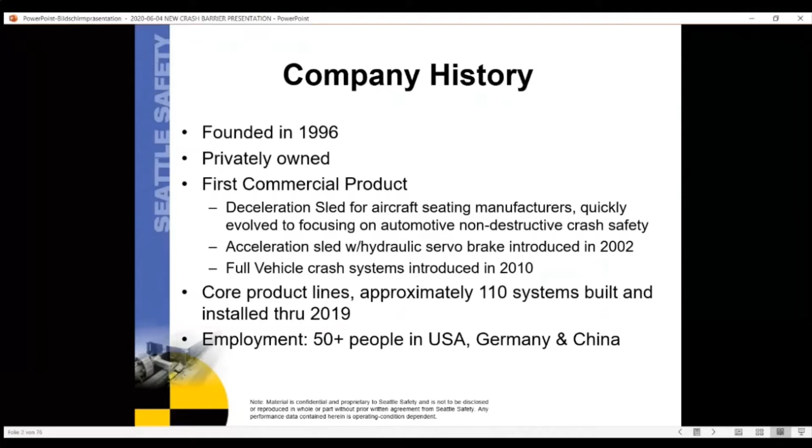We have already 110 systems on the market. From the barrier labs, I would think the number is about 7 or 8 on the market. We have 50 people working for us in the US at our main headquarters, then in Germany and in China. As I said, our owner and lead engineer is a person who is very much into development.

His vision is really providing innovative solutions of unparalleled value to our customers. That's something like Porsche did. They come to us and say we have a specific question, a specific issue we need to deal with, and then we come into the game and develop something specifically for them. And afterwards, we use this technology to go to a wider market, like we do with our barrier products.

So, a short overview of our products. Crash barriers, I already mentioned. Decelerator sleds, typically used for aeronautic seats nowadays. Servo hydraulic sleds are a very important product for us, our bread and butter product, with 110 systems worldwide. I think in India we have 4 systems sold at the moment.

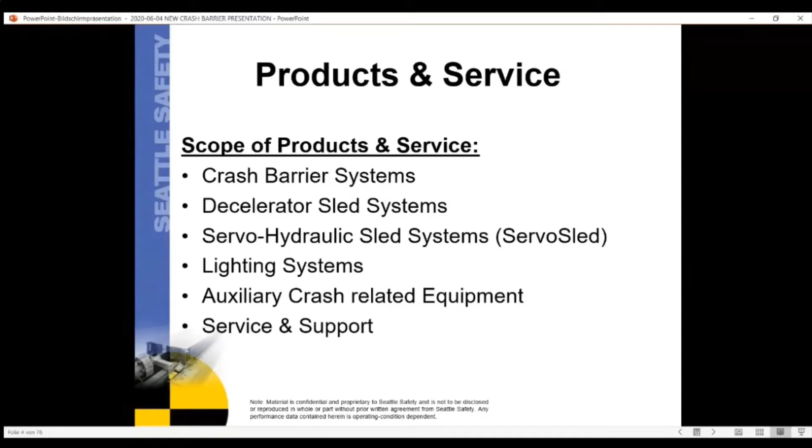Lighting systems, LED lights is what everyone wants to have at the moment. We offer a very good and affordable LED light system with our barriers and with our sleds. And certainly we have some auxiliary crash-related equipment. Most important, and that's why I really emphasize this, is service and support. We're having service and support from Europe and from the US, so all our customers are getting in-time service, very proactively.

ServoSled, I'm just going to show a few pictures. Here you see a ServoSled with an LED light, which we manufactured.

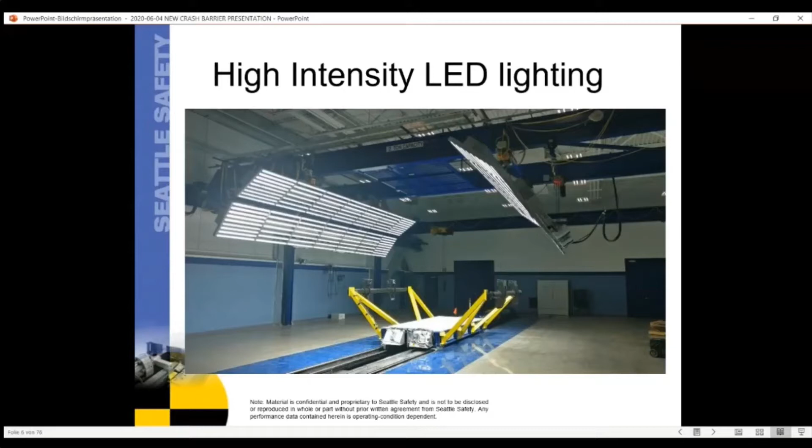And certainly the full crash vehicle barriers, which is the topic for today.

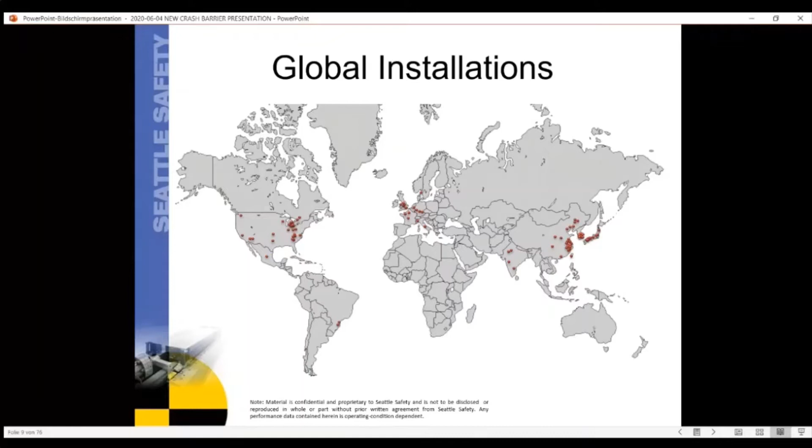I'm going to share this presentation afterwards, so if you're more interested, go through our customer list. You see here 1, 2, 3, 4, 5, 6, 7, 8 systems already on the market for our barrier systems, and we have a global footprint. That's so important at the moment, especially since many of our customers have a sled in the US, in India, in China, and want the same results—that's why they all go for our sleds and barrier systems.

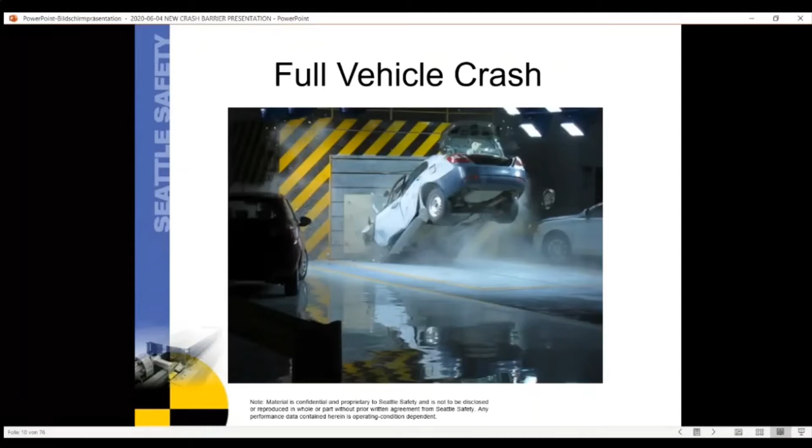But now let's start to look into the full vehicle crash barriers, which is the topic for this meeting today.

There was a reason why we went into this business. There were one or two players in the market before. As I mentioned, Porsche approached us and said we need a better system, something which fits into our facility and is tuned for us.

So why do we need better systems at the moment? I think the most important topic to understand is that accuracy is what's driving crash barrier systems to get refurbished or replaced. The technology used in older crash labs comes from the 70s or 80s, and things have changed since then.

For example, there's the very high accuracy of impact position. You want to be able to hit a target—a crash barrier or vehicle—with a trolley within a few millimeters range. That means you can't allow a free run of the car between decoupling from the rope and hitting the barrier of more than about 1 meter. Because a free run of 1 meter means that even if the car is pretty well aligned, you're going to hit the position you want, plus or minus 10 millimeters.

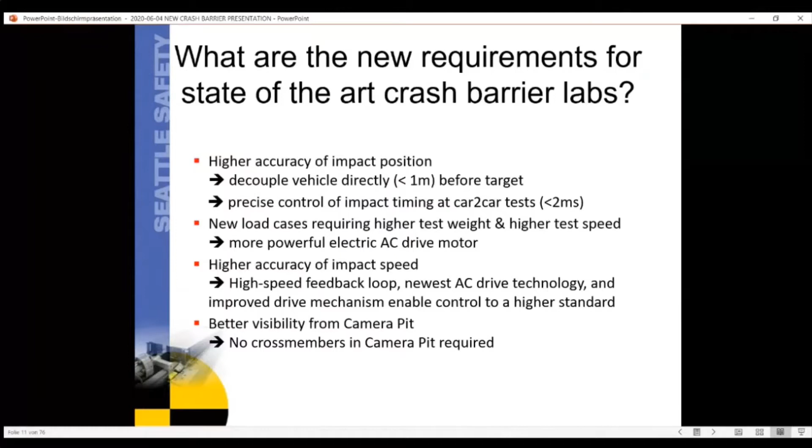Then we can drive back the power a little bit so we have the right position at the right time. And very important too, because the simulation departments have such a fantastic way to look at vehicles during the crash, they want a better view from the pits, from the window, from the film pits below the car. So we developed a film pit with no cross member, giving a very good view from below without structure hindering the view to the bottom of the car.

So the basic principle of a crash lab, I'm sure you all know this, but I want to shortly explain it because later I'm going to use terminology which comes from here. It's a loop of rope. On the loop of rope we have something we call a skate. The skate is fixed to the rope, and the skate is pulling the vehicle towards the block. Then you have a film pit in front of a block, and you have the crash block. That's where you hit against.

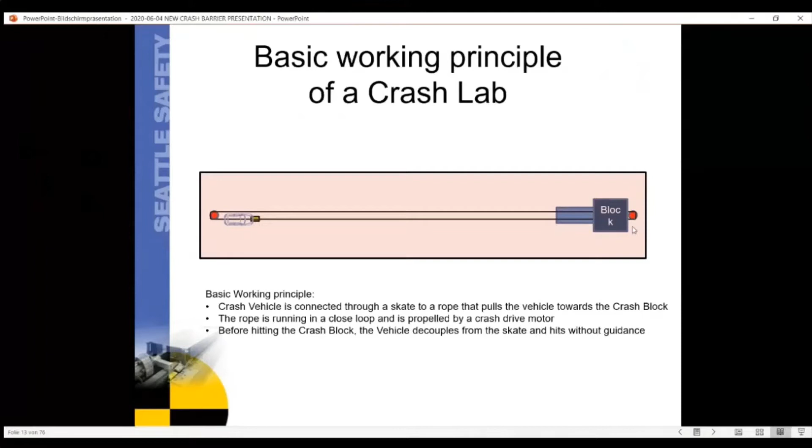Or you have a film pit here, and you have a side crash, for example, on a standing car. Behind the block, or at any position, we have a motor which is accelerating the car and which is controlled by a control system.

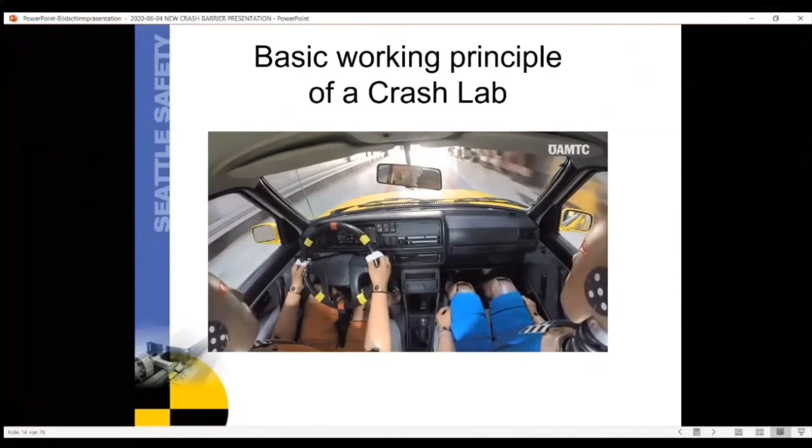That's exactly one of these crash labs I'm talking about at the moment. It's just a single track crash lab. You go in one direction and you hit a block or another object you want to hit with the barrier.

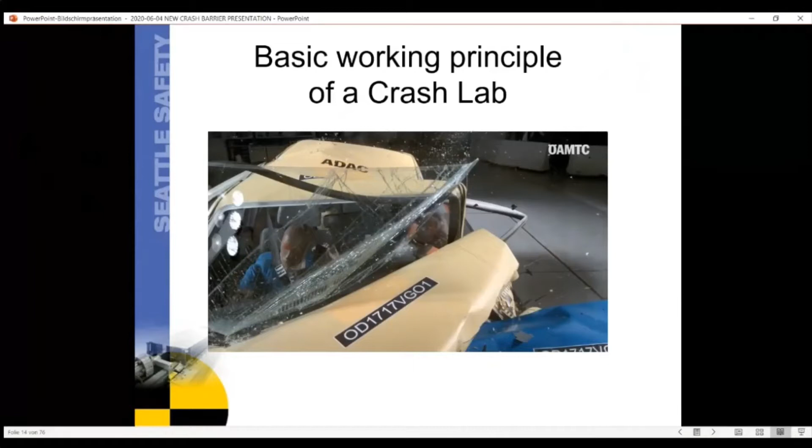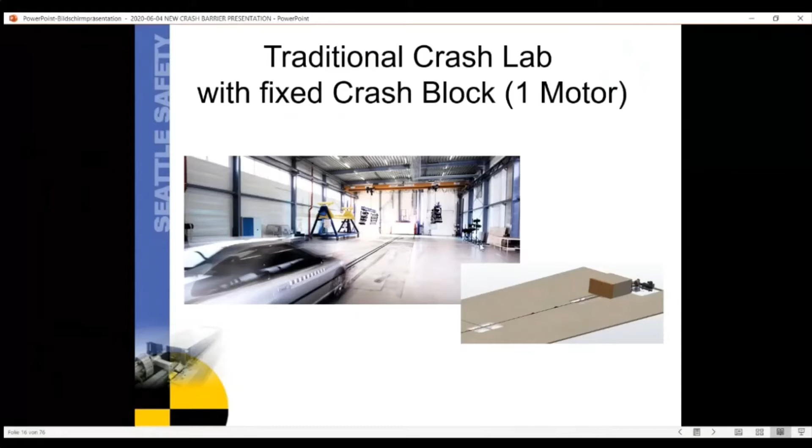Then the more new design is looking like this, I guess. So we're talking about a crash arena. That's driven by the fact that you want to be able to do car-to-car crash. So you want to have two cars, one coming from the right, one coming from the left, and you want these cars crashing against each other or against an object standing on this big film pit in the middle. The big advantage is you just need crash light once. Crash light, LED light, is expensive, so if you can work with one crash light, that's better for you.

And then you have this movable crash block. So in case you don't want to do a car-to-car crash, this block can ride into the crash arena, is going to be positioned behind the pit, and you're going to have an impact point. Here, we say the crash arena is 30 by 30 meters.

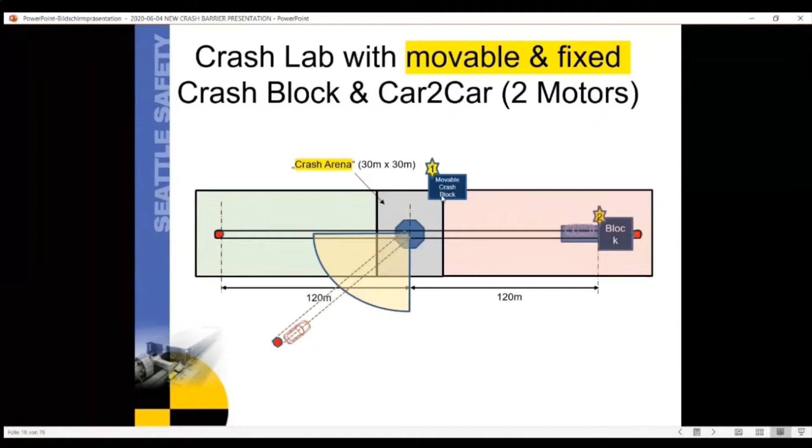Then another layout for a typical crash arena is here. This is a customer, Ford in Germany, who's just getting a barrier from us. They have an old building, which is the rosé part here, with a crash block, a drive system and a pit. They wanted to be able to do car to car. So what we are doing at the moment is building the whole system new, and they get this crash arena here, and they get another track.

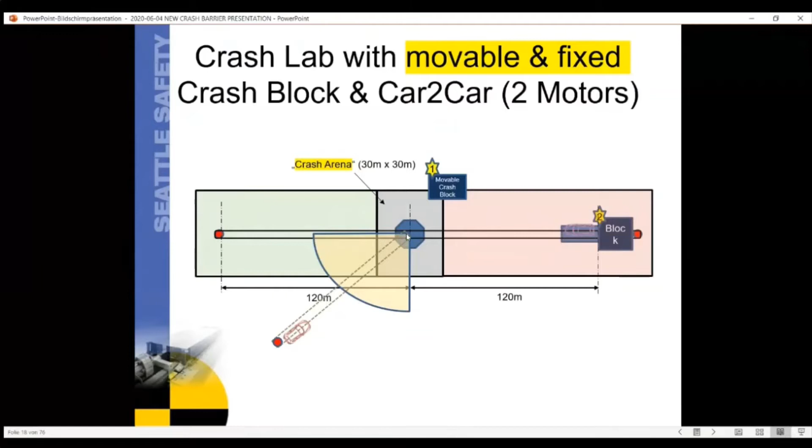120 meters is pretty much what you want to have, to be able to accelerate with a maximum acceleration of 0.2 to 0.3 G until you hit, because you don't want your dummies jumping around in the car from very high acceleration. So again, here it's the same constellation, but in this case we have a second motor, and the second motor is also driving an angular track, which is able to hit cars coming from here or from here, depending on what kind of load case you want to run.

Why are we using this kind of crash arena style? It's shown on this picture. On the top picture here, you see the zones which have different colors.

These zones we call crash influence zones. These are areas where we looked at all the load cases going to happen on this crash barrier lab, and looked at the position before and after the impact. This is a position where a car or trolley could be after the impact, because it's sliding away, because it's rotating away. So here you see that doesn't fit into a small room. So we decided to go for, that's a typical layout at the moment, 30 by 30 meters.

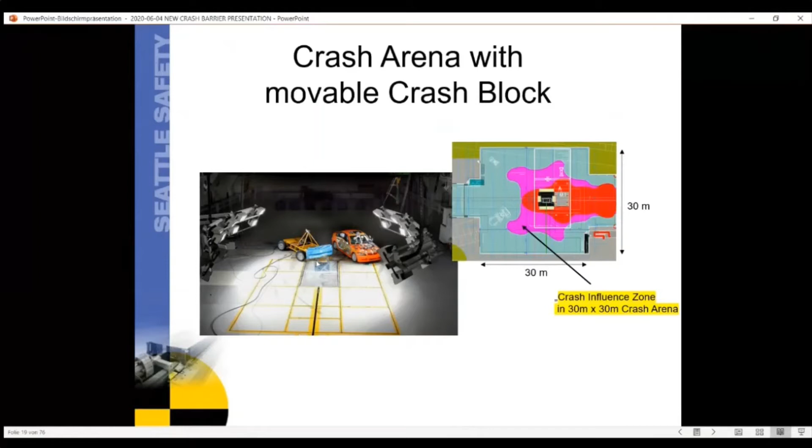And all testing is pretty much taking place in this crash arena. You can see the light here, you can see the after-crash situation. That's how it works. Location of the crash drive, so the motor.

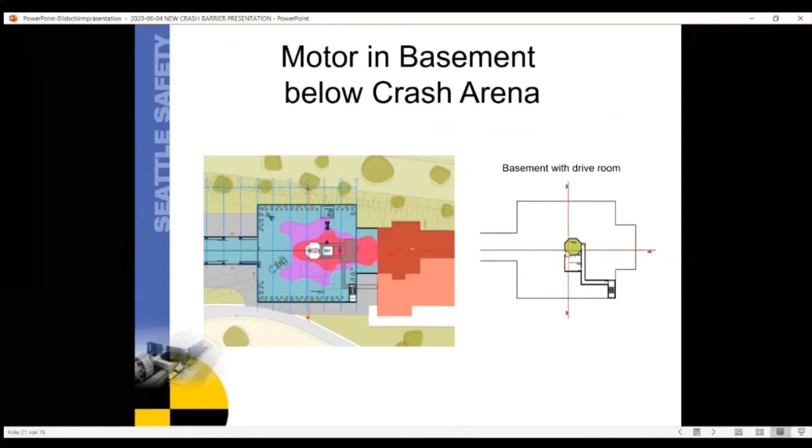We have different ways to position this. The modern way for many new crash labs is, especially if they work with a crash arena, they have the motor below, somewhere in the area of the crash arena below the floor, in the basement. Then they would have a simple gang to the basement, and the motor would be installed down there.

It has an advantage and disadvantage. The advantage of this is clearly, if you accelerate cars from this side, especially against the block, you want to have as little rope between car and motor as possible, because the less rope you have between car and motor, the less spring and deflection you have in the rope.

We have a solution for both, a very accurate solution for both ways of positioning the motor, so for us it's not really necessary to position the motor below the track.

The disadvantages are certainly its accessibility. You need to go down to the basement in order to access your motor, and even worse, if you want to do a car-to-car crash, say a right-hand to right-hand side crash, you see that the right skate is not able to run directly onto the film pit, which we usually want to have, because, as I said before, you don't want the free run of a car to be more than 1 meter. So here you have to stop the skate before it goes down to the basement and comes up again. The skate cannot run over this gap.

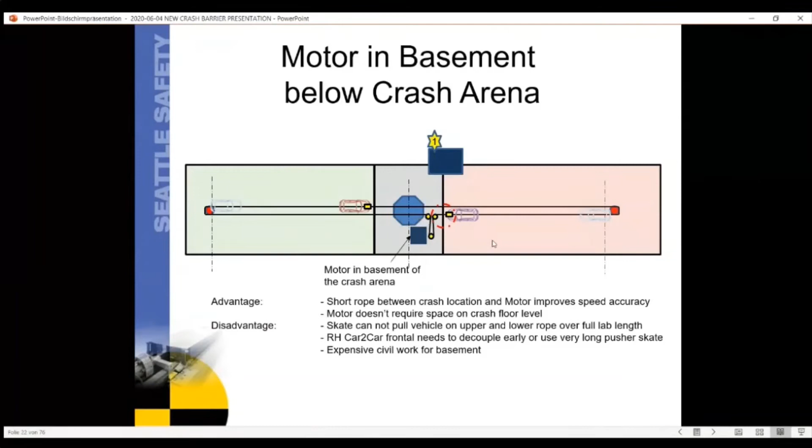There are other solutions for how you can still control this, but it's a little bit harder to do. So we pretty much do both, but we prefer the motor at one of the sides of the crash barrier, because then you have the possibility to have both sides of the rope going forwards and backwards over the whole length.

Many customers want to do parallel testing. So what they do is one test on the middle pit with a block standing here, and at the same time they already prepare for a second test on this side. So they're much more effective, and can do 2 tests in a very short while. This is a big advantage of having a rope going through the whole facility.

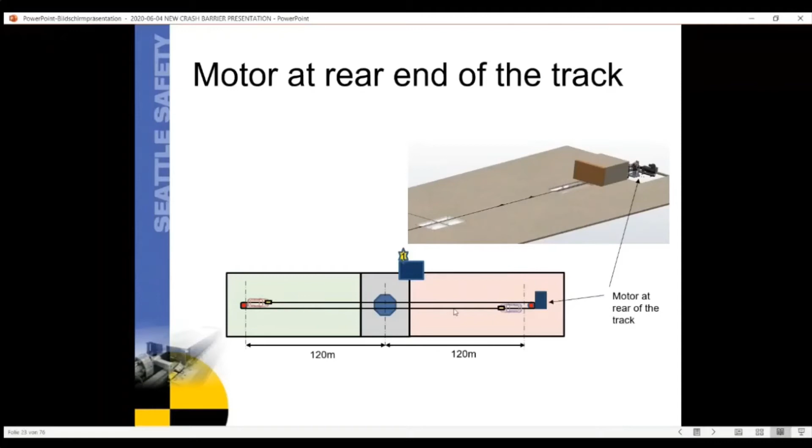Here again, the motor at the rear end of the track, and you can see now both skates can go up to the pit cover and window, and you can accelerate both cars very much until they hit themselves. You would decouple perhaps a meter before the impact point, because you clearly want to show on a photo and in proving data that there was no connection between car and rope, which is necessary for legal testing.

Here we have the possibility to prepare two tests at the same time. If you just want to prepare a high-speed test on this lane, you can already prepare for a low-speed test on this lane, and everything is fine. The disadvantage of this is a little bit less accuracy, even though with our control systems we are still able to control this to less than 0.1 kph.

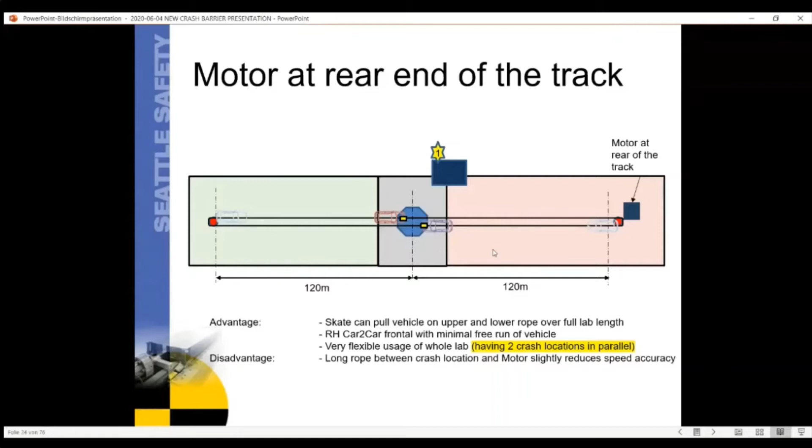Bare friction drive - that's something I want to explain in a very detailed way. As I mentioned before, Porsche was the first customer for this specific drive, and they already had an existing drive room.

The advantage of this new drive is we can run it with both the existing steel ropes, like you've probably seen in typical crash barrier labs, but nowadays our customers start working with high-strength polymer ropes. There are some advantages with polymer ropes. For example, the weight is much less, a tenth of the steel rope. There's a big advantage in breaking behavior, and it's less dangerous if a rope breaks.

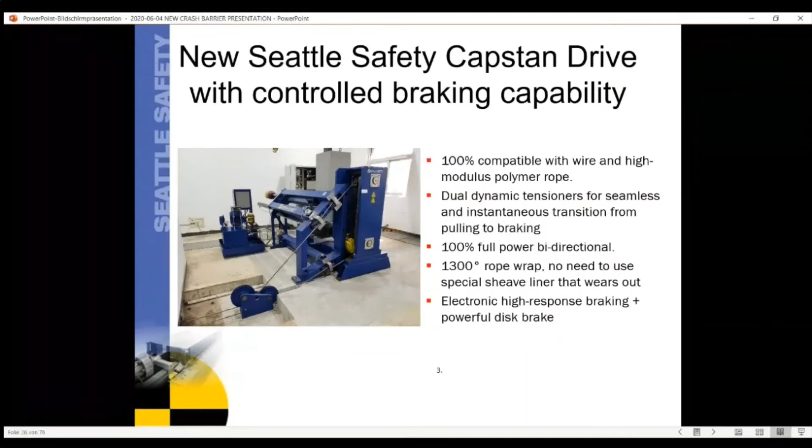This 1300 degree rope wrap we are talking about here is very important. The rope wrap shows how much force you can put into the rope - how often the rope wraps around the pulling sheaves - and that allows us to tension with much less force. If you have a high number of rope wrap, you don't need big tensioners, and then it can be quick - we can switch from one direction to the other in less than 10 milliseconds.

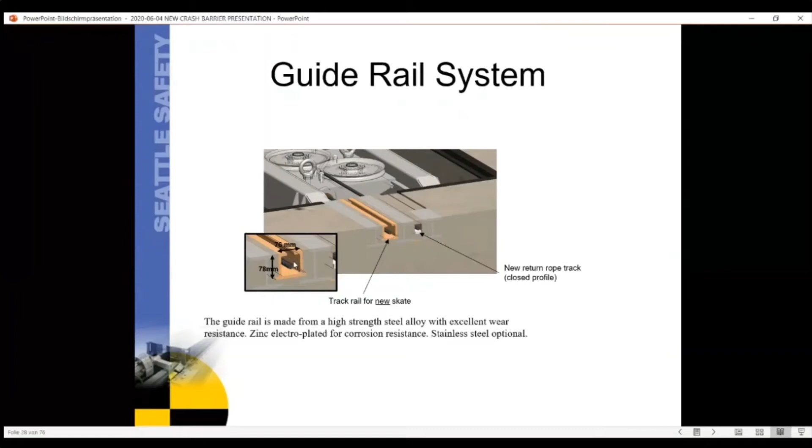Our new rails, the micro rails we have, are 78 by 25 millimeters high and wide - that's very, very small, pretty much the same as our competitors have. That's a very typical arrangement. Here you can see this was at a lab where we already had rails on the floor - these are the old rails for the skate, and this is a new rail for the skate, and the skate is running in this rail, so the skate is guided by this rail.

There's a difference between the distance between the guide rails. What we introduced, and I think we were the first on the market to introduce this, is having a distance between the two rails of 125 to 130 centimeters.

There's one good reason for this: visibility from the film pits from below. You want to be able to see the full vehicle from below and see how the motor is behaving, how the structure is behaving, and even how the exhaust system is behaving. So you don't want both rails in the middle of the lab, because this would cover much more of your vehicle. So we decided to go with a configuration where one of the rails is mostly below the wheels, so you have a very small rail when looking from below, and you can see the whole vehicle surface and underbody and how it's behaving during the crash.

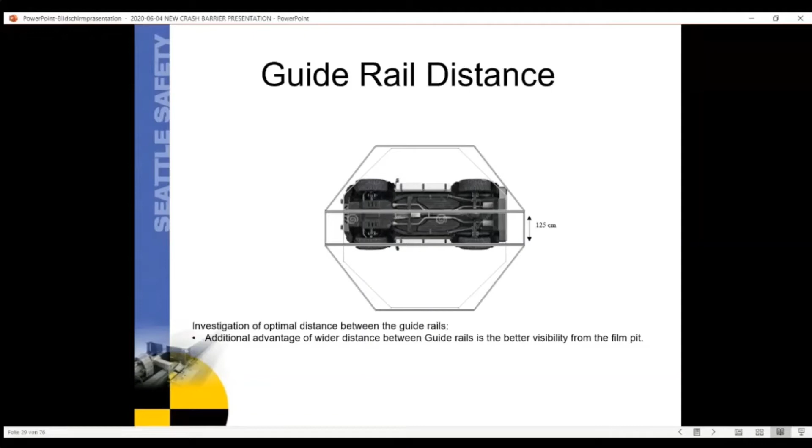Another very important reason we built this is for car-to-car crash with offset. There hasn't been a good solution from my perspective until now, because there are small outriggers on the skate which put the excenter to the car before they crash. The big issue with these offset bars on the skate is that one of the wheels always jumps over it, so it destroys your outrigger after each test, and the test doesn't happen like it should. There shouldn't be any involvement of any other part of the skate that keeps the wheel from turning or keeps the car from rotating.

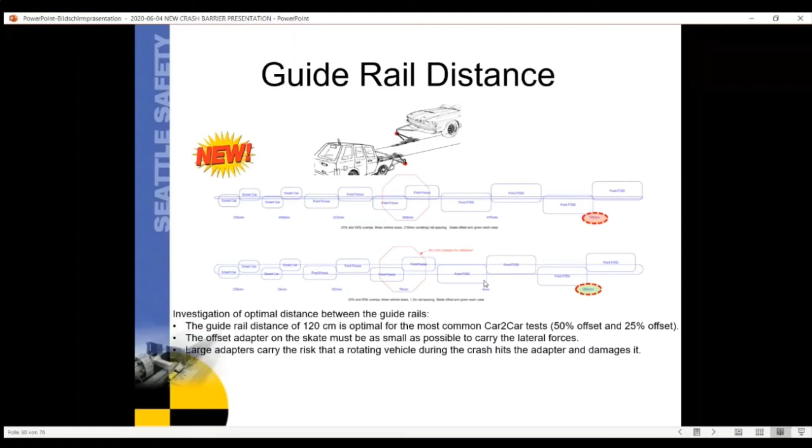So we looked into this and recognized we can have much smaller triangles, these offset triangles, if we have a wider distance between our rails. So in the wider rail configuration, the maximum excenter we need is 300 millimeters, 30 centimeters, and for the smaller one it's 790, nearly 800 millimeters — so it's more than half a meter, a 0.8 meter long offset arm needed for this configuration. We run with these configurations and are very happy with this.

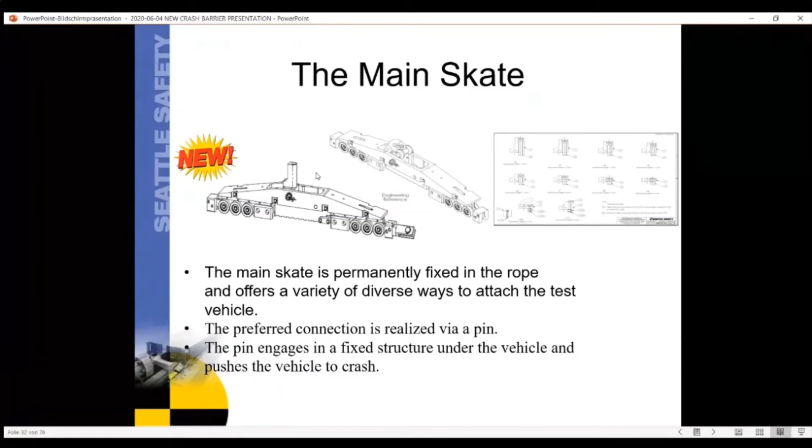But here I can explain quite well how the system works. So the skate is running — as said before, you want to decouple the vehicle from the rope and from the skate approximately 1 meter before the impact takes place. That's exactly where you position this triangle, and we have a ramp for that.

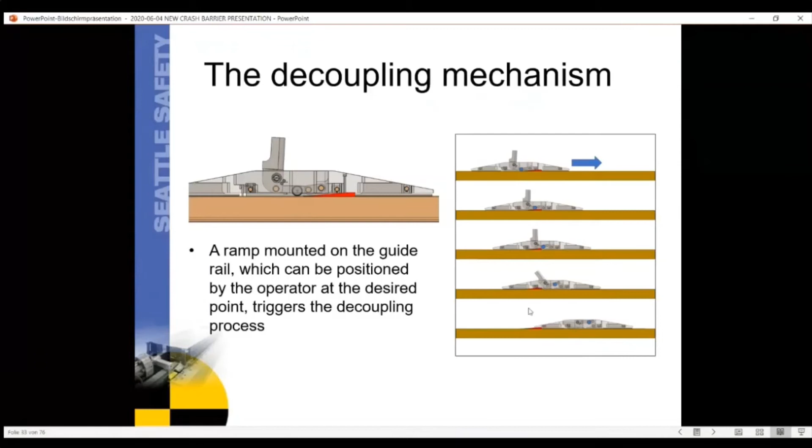We have a small ramp, a steel ramp with magnets in it, and you position it on a rail. When the skate runs over this ramp, there's a triggering mechanism, so the post which connects to the car falls down. You can position the ramp wherever you want on the line — it just sticks with a magnet to our rail. Then as it runs over, it starts to tilt and falls down, so there's no more connection between car and skate.

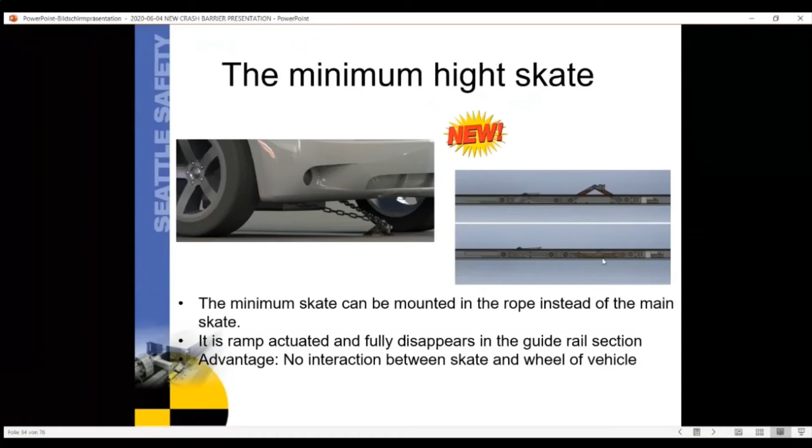What we have too is a second skate, and here's one application I can show you for the second case.

Now, oh, why didn't it work? Here we go.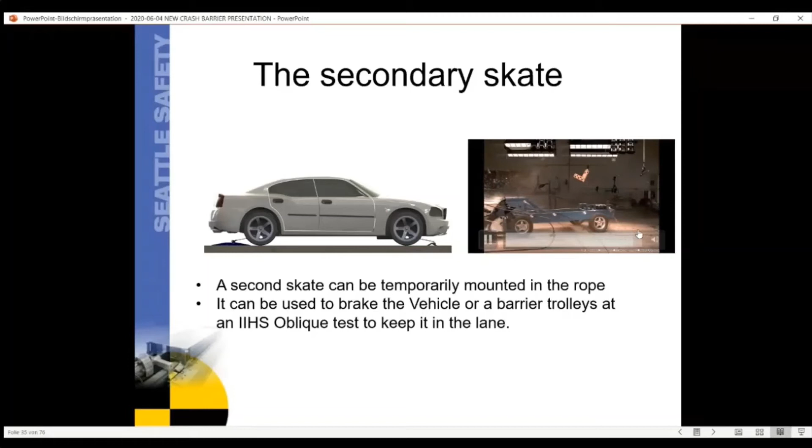You see a trolley coming. The trolley is equipped with two skates: one skate pulls the trolley, and there's one skate behind the trolley. In this configuration, after the impact, we brake the trolley so there's no second impact between car and trolley. This is required for some load cases, like IIHS oblique. So you don't see the other skate here, but there is a connection, and the trolley is braked.

Another feature we have with a second skate is this one. I told you before that we were not happy using triangles on the skate in order to offset the vehicles or the trolley. So what we are doing here is equipping the trolley with a fixture which is able to shift the attachment point, or the rail, from the very left to the very right.

So here you see the trolley is on the very left side - that's for a high overlap crash. And here, for example, you see the trolley is very much on the right side. So you don't need any more triangulars on the skate - you can just do this by modifying the position the trolley is running.

Why do we have two of these structures? Because the pulling of the trolley happens eccentrically - we're still pulling here - so we need to control the moment of inertia, and that's why we have another skate behind there. But shortly before impact there's no more pulling at all, because we do a ramp with pulling. Then both skates disconnect, collapsing fully into the structure, and the whole trolley, without running over a triangular arm of the skate, can impact the other vehicle and do the test as it's supposed to be.

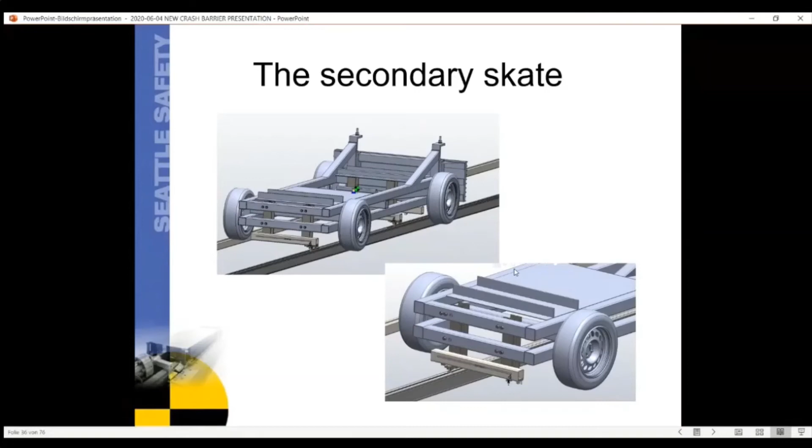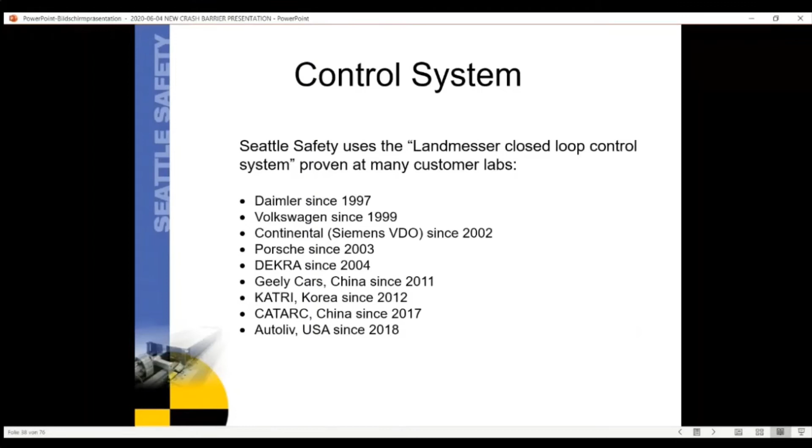Control system - let me give you some words about the control system. We work with what we call Landmesser control. It has been working with crash barriers for a long time, with Daimler, Volkswagen, Continental, Porsche, DEKRA, Geely, CATARC, and Autoliv in the US. And now Nissan in the US, Ford in Germany, and another Chinese customer are getting it too.

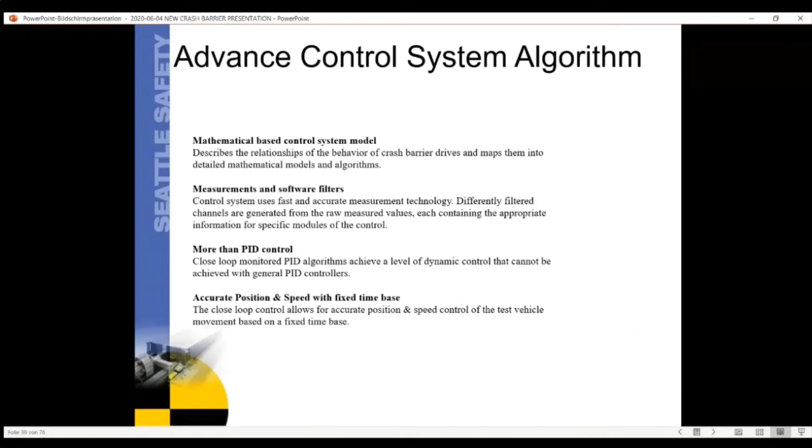This control mechanism is more than just giving power and pulling the vehicle or the trolley. It's about controlling the speed and the position of the trolley over the acceleration phase, every single millisecond, to be able to have a very accurate impact point, impact speed, and impact timing. Here I show you - very important - it should never overshoot the speed, so there should never be a case where you don't approach the target speed.

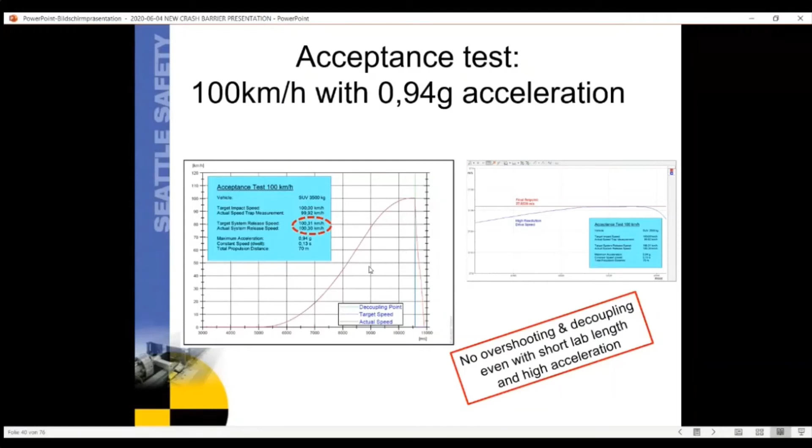And we were able to do this with a tolerance of 0.01, because the set point was 100.31 and the outcome was 100.30. So we were able to control this very high acceleration impact very accurately.

Here is something I've shown you before. Many customers need to test their autonomous driving features at the moment, and the first one is pre-impact braking. That came very early - it's the car recognizing shortly before an impact that the driver is not paying attention and is not braking, so the car does an automatic full braking to reduce the speed at impact. It's not that you won't impact anymore.

We want to reduce the maximum speed. We impact the other car, so the car itself brakes suddenly, and this puts the driver—because he doesn't recognize that the car is going to brake soon—in a different position in the car compared to the airbag. So if the car's braking, the whole body is already going forward, already in the air in your belt. It's a different seating position than if you would just hit the wall without any pre-impact braking. That's why you have to prove that even with pre-impact braking, the belt system with the airbag system works fine. So how can we prove this?

How can we do this? In a crash lab, it's very hard to really use the sensors. So what we are doing, and using prototypes very often, is without an active braking system. What we have here is a car equipped with a brake which we can control through remote control. We propel the car to 80 kph, and that's where the vehicle brakes are triggered. Then the vehicle brakes are braking down the vehicle, and we allow this to happen. The brake is braking a little bit harder than it needs to, like 0.6 G for example, when we want 0.5 G braking. This means the motor is still pulling a little bit, still controlling to have the right speed at the impact point and at the right time. That's something we were able to prove with very high accuracy—that we were able to provide this pre-impact braking on a crash lab.

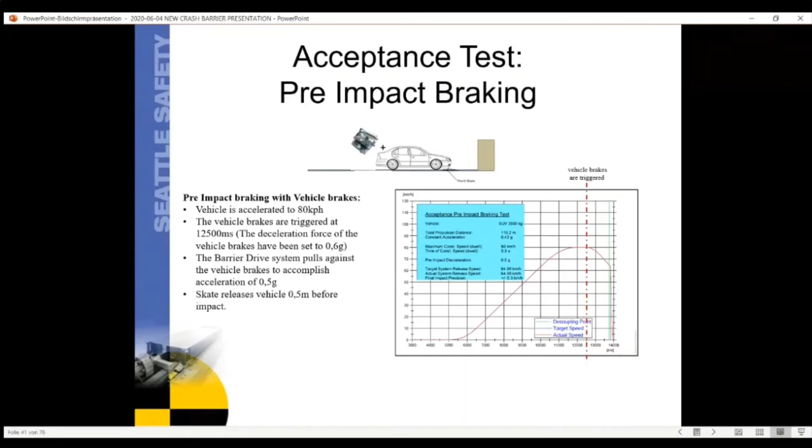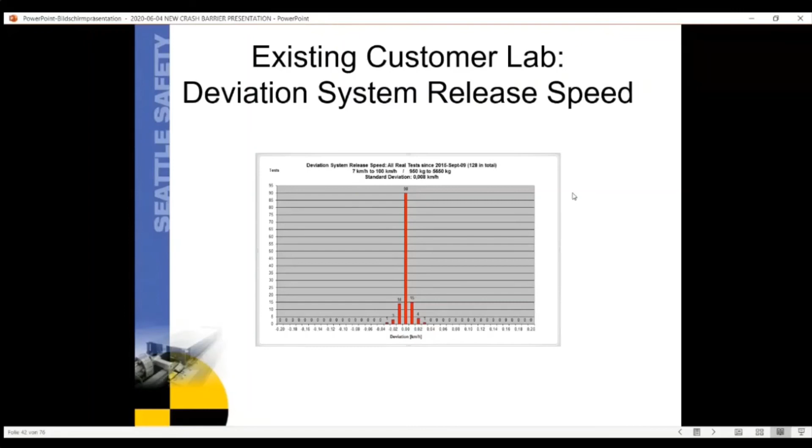Showing you some of the actual projects. Complete and installed projects are Geely in Hangzhou, Porsche in Weissach, CATARC in Nanjing, Autoliv North America, and Millbrook in the UK. Actual projects I'm going to show you are Ford in Cologne, Henan in China, and Nissan in North America, where we're just working.

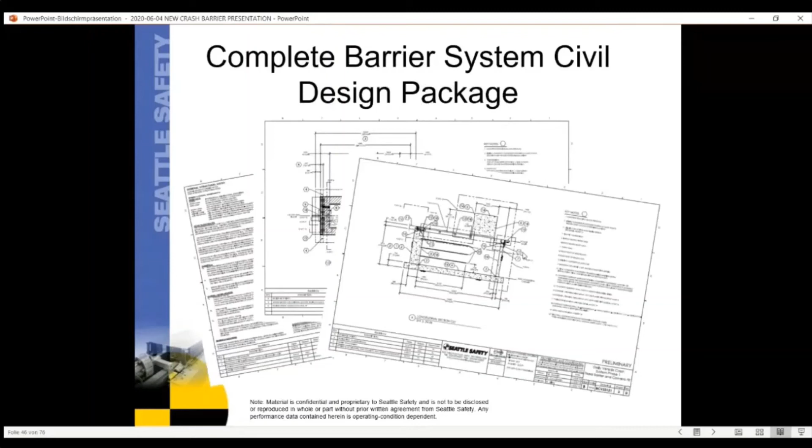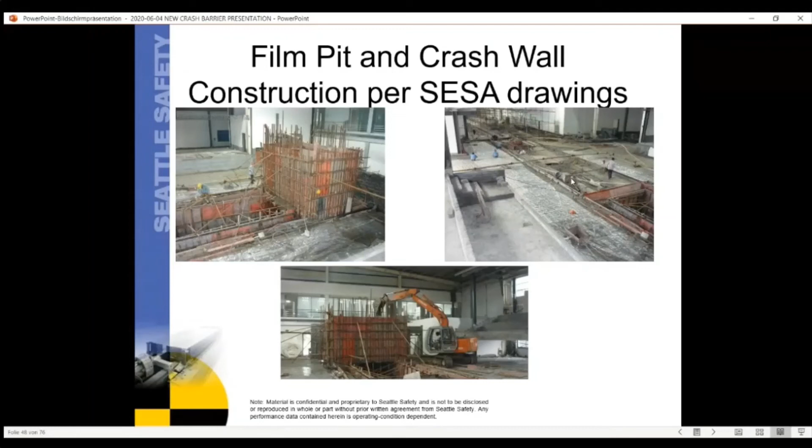The Geely project was a project where we still used one of our old drive systems, but at Geely we were responsible for the complete package of civil drawings. You see here the building efforts for the film pits and for the reaction block—this is the reaction block being built. Here you see the first works on the tracks, our very small 76 by 78 millimeter track we're going to have in the concrete floor afterwards.

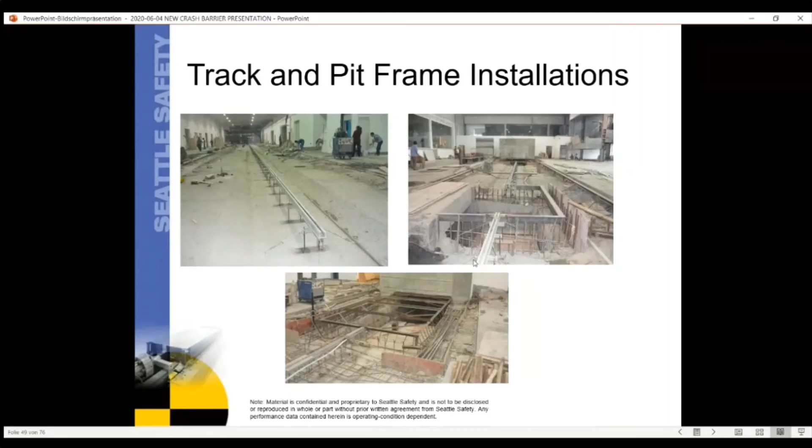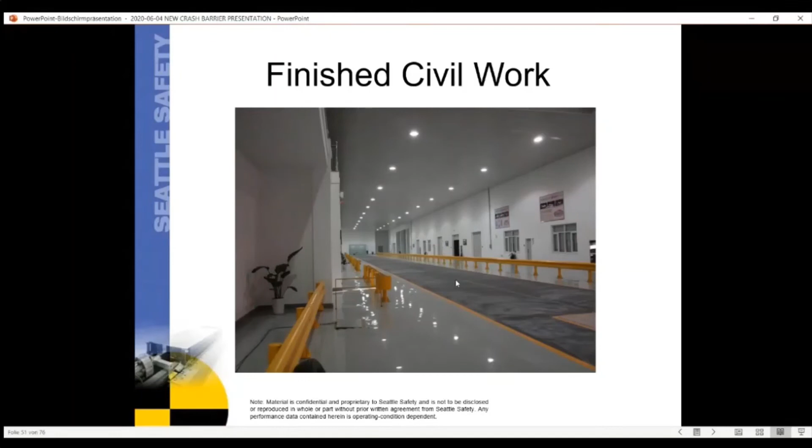Here it's aligned—we laser align it over this long distance. Here you see the same, how it's running into the film pit and how it's running out. The film pit window needs to have the same track because you want to run through this window. Here you see how the workers are getting the floor done, and in the end you see this finished lab with a very nice, smooth surface and the right friction for legal testing. Some pictures of the motor.

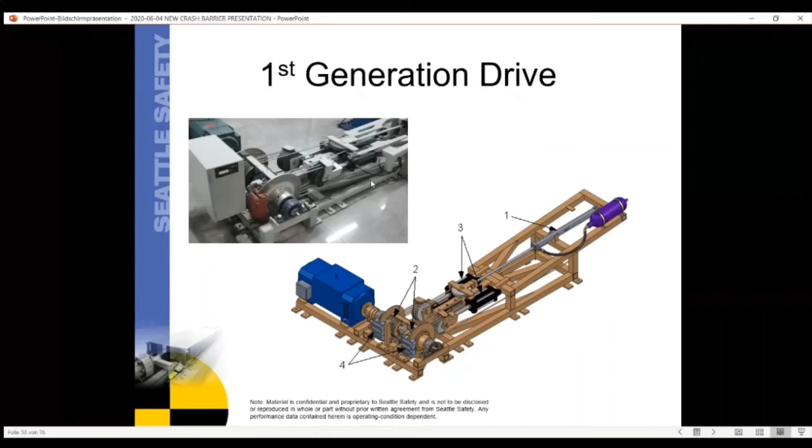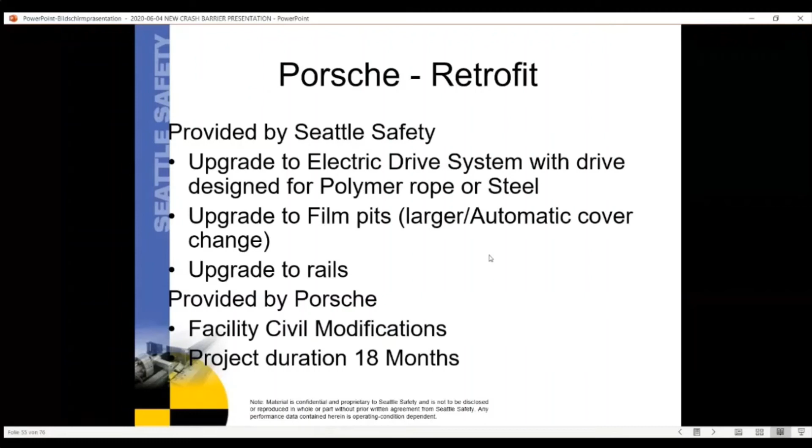As I mentioned, this is the first generation of the drive—the typical drive like our competitors use. We used this at Geely at the time. The Porsche retrofit was the first retrofit where we used our new design, the second generation. Here you can see very well how this wrapping angle I was talking about gets us to the 1350 degrees. You see this rope wrapped around all the sheaves, wrapped around in this manner, and every single one of these sheaves is propelled. Here you see the other side—they're all connected by drives.

So all these sheaves are propelled, and that's how we can reduce the tension force needed before or behind the line. We can use very low tension forces and thereby very high accelerations for this tension. So changing from one direction to the other is very, very quick.

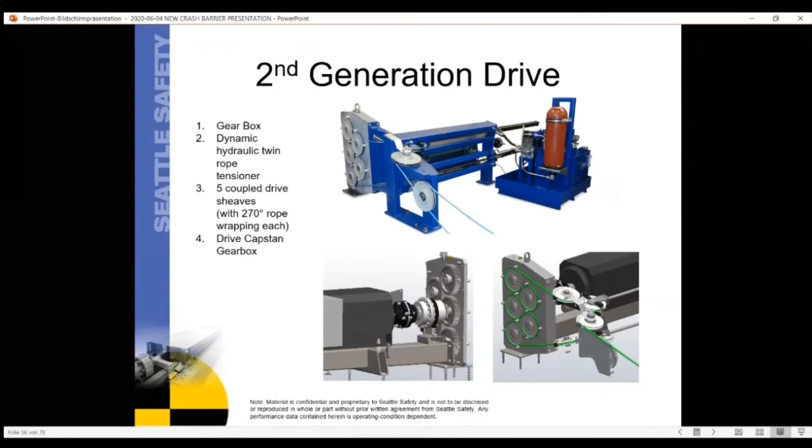So we designed something where our glass window was below this cover for the forklift, and with our motors we lifted the cover for the forklift, then you could slide it sideways, so you'd never have an open pit window. That's something very specific for Porsche. We haven't built it since then, but if you have some of these kinds of issues, just approach us and tell us what you need.

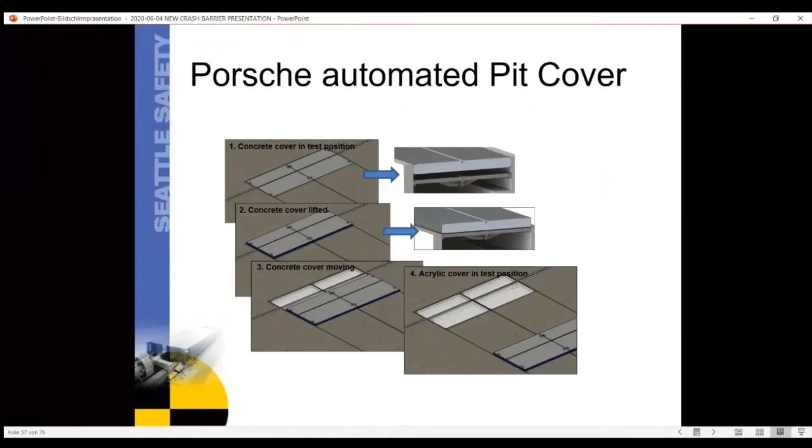Here again you're going to see this. On the right side, you see the cover of the film pit for forklift driving, and here you see the film pit—it's still covered with some wrap so it's not very nice, but here you see the rail running through the film pit.

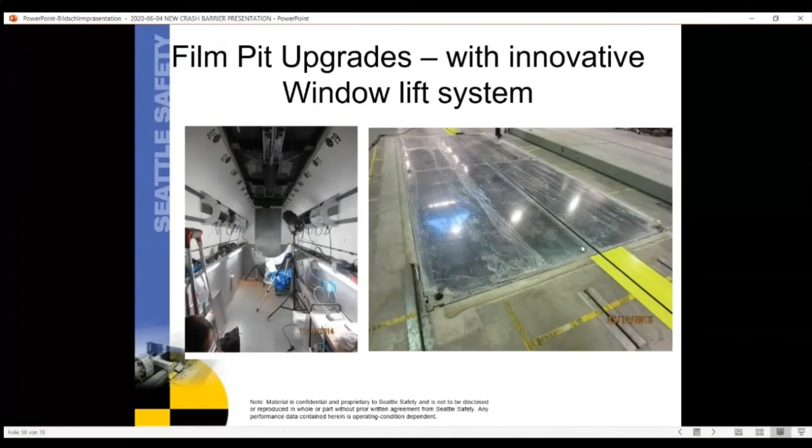One picture again without our cover—this is the old rail, and here you see how the new rail is installed inside the old rail. We were able to cut the flange a little bit and then install the new rail, our micro rail, into this. Here you see a sheave where the returning rope goes down to the pit floor.

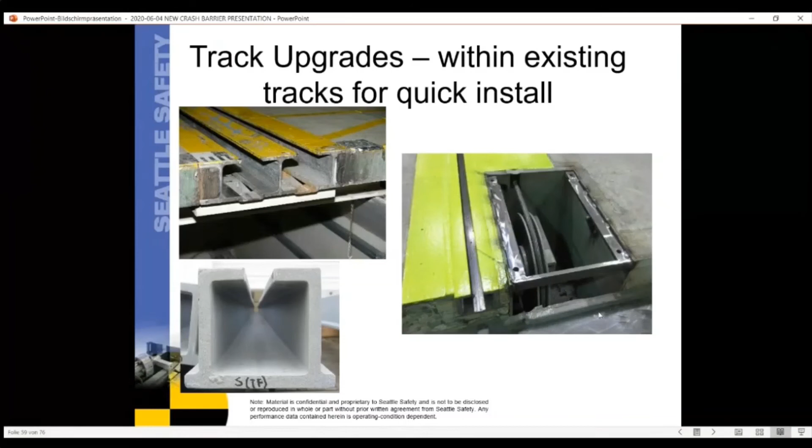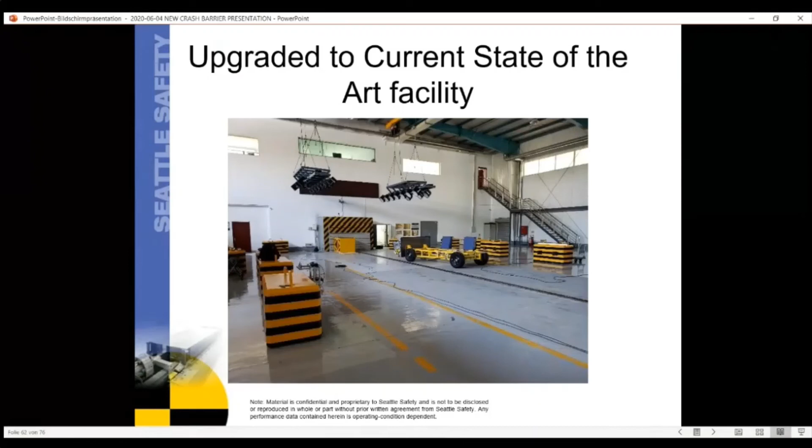CATARC in China—we did something very similar. They had an old barrier system, which we fitted with our new drive system, the second generation of the drive system. And here's the third generation of the drive system, where we don't need the sling profile. Here we have a rubber belt. We have two drives, where the sling wraps around, and they're both connected by a rubber belt system.

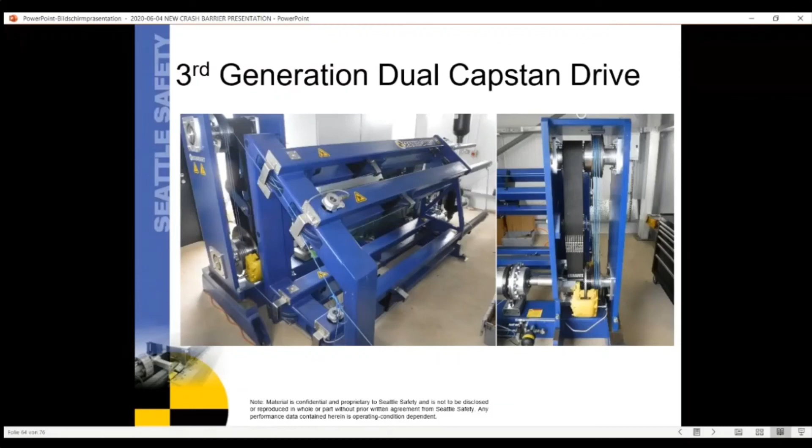It works at least as good as the Porsche system at a lower cost and a better price for the customer. Autoliv North America had a very similar issue—very short track, very high speed acceleration they needed to achieve.

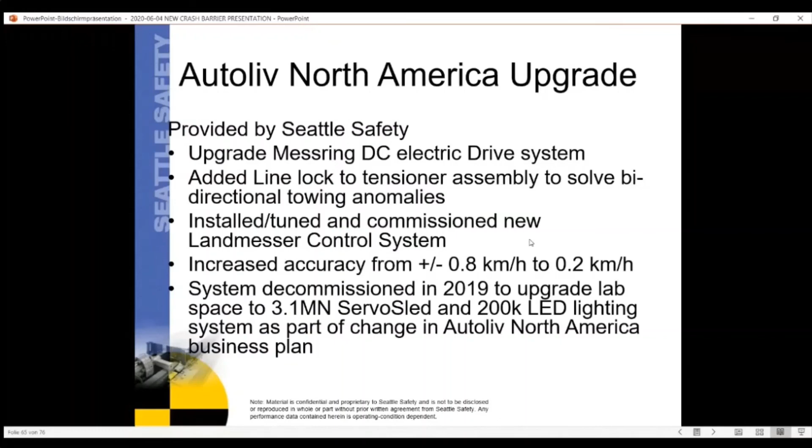The Millbrook Proving Ground is a European lab in England where we did the same. They have a dual approach. The first step we did was just building the motor and drive system, and the next step, coming up this year, will be building the new rail system with new skates. That's something we can discuss with you too.

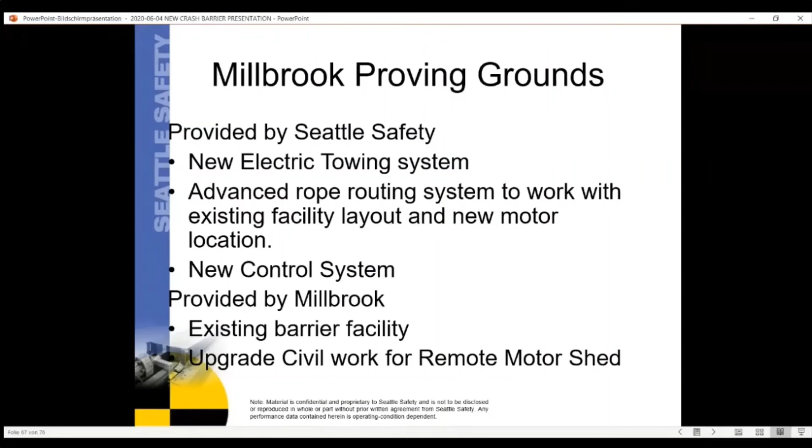Many customers cannot afford to have the lab down for 3 months because they have testing to do—they can afford only 2 or 4 weeks. So what we offer first is changing the drive system with all the control system so the accuracy of speed is already there. In the second step, we can retrofit the lab during the next summer vacation, for example, with new rails and new skates, so the accuracy of impact position is also there. This is something we can discuss, or even other constellations.

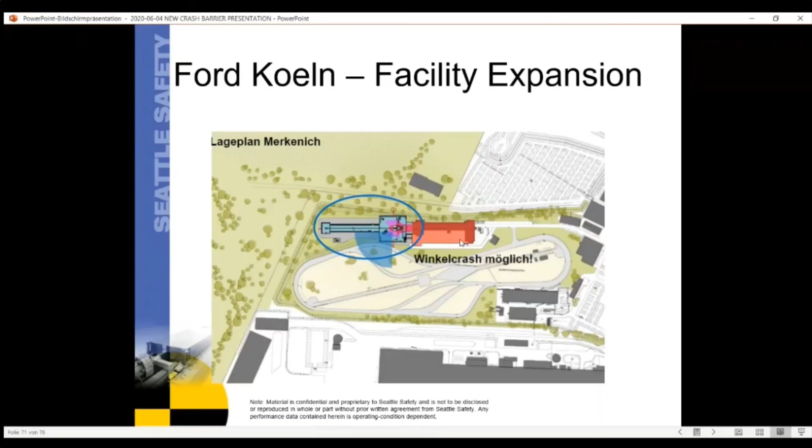Okay, upcoming projects—here's the Ford system. I told you they had this old crash barrier building, and now we are building the new one. The whole building and whole length is going to be refurbished with new rails, new technology and everything. Here's the site, the track where they can do angular crash impact.

The Henan Institute in China is interesting because here we use the same technology and the same motor to run with 25 ton vehicles—that's 25,000 kilograms. We need a longer track because we can increase the force quite a bit, but you still need a longer track in order to hit the impact speed you want to have.

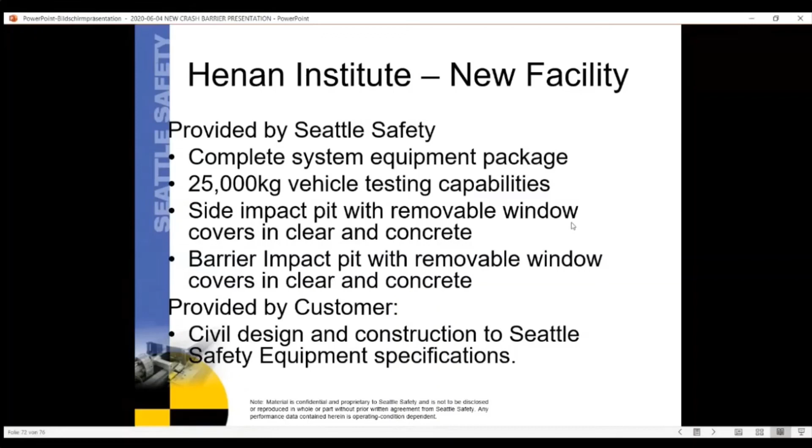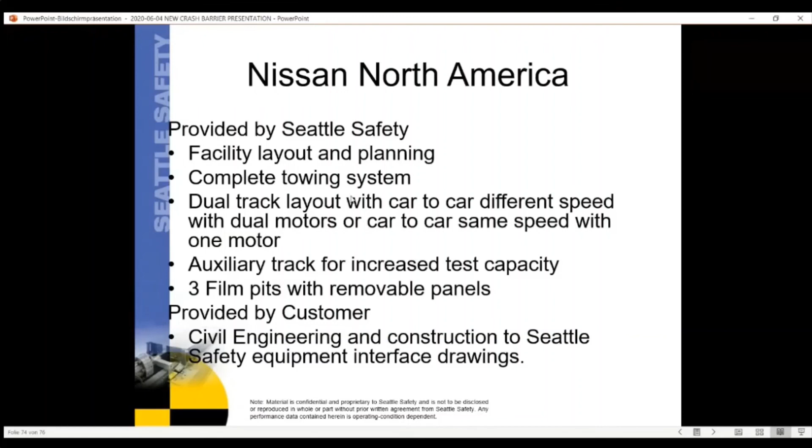And this is North America, something I can show some pictures of. So it's the complete track. Nissan North America has a complete greenfield facility, so everything is new there. We are doing all the technology for this plant. Certainly the civil work is done by another company, but we bring all the crash technology, and we are really happy to have Nissan as a customer.

And what they have is something very special. They have 2 parallel crash positions because they need to do more testing. They have one for low speed testing and one for high speed testing. So we can do different constellations here. We have 2 motors, 2 drive systems, and either one motor drives the upper position and the other drives the lower one, but we are also able to do car-to-car crash with 2 different speeds.

That's very important if you're doing testing where you want to reproduce an accident that happened in reality. Both cars didn't have the same speed, and typically car-to-car crash can only be done with the same speed. But here we have 2 motors, 2 drive systems, so we can really reproduce the constellation like it was in the real crash scenario outside.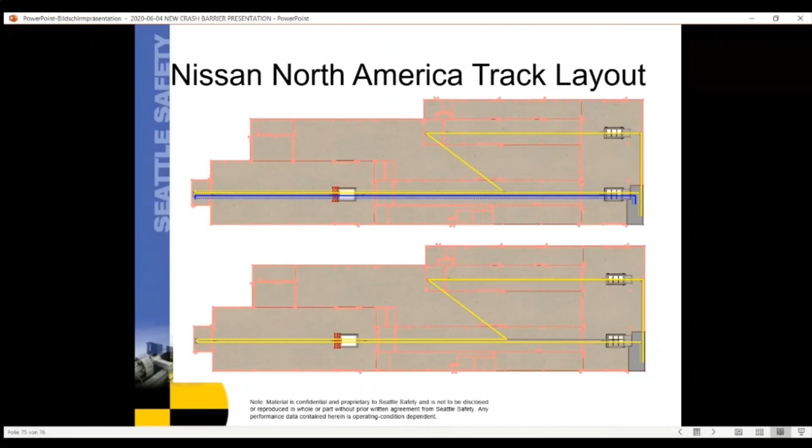So it's really what I showed you here in this presentation. I hope it came over quite okay, that we can do both. We are happy to install a brand new lab, while we are at least as happy to retrofit an existing lab with the technology you need, and not just with technology we have, but with what you need.

And we're going to listen to you, we're going to talk to you, we come back with a proposal from our engineering, and we're going to find a good solution which allows you to do the testing of the future and which allows you to retrofit your existing lab in order to have the most modern lab afterwards, without the big investment of a greenfield lab. Thank you very much, I think this is the presentation I wanted to give.